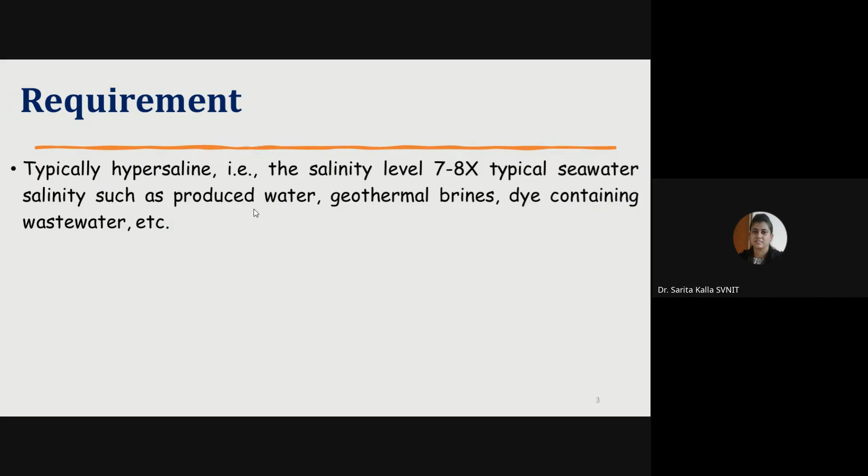Fine. So we all know that hypersaline water generally has a salinity level 7 to 8 times that of normally available water. That generally comes in the form of produced water, geothermal brines, dye containing wastewater, etc. So we have different treatment processes for this hypersaline wastewater.

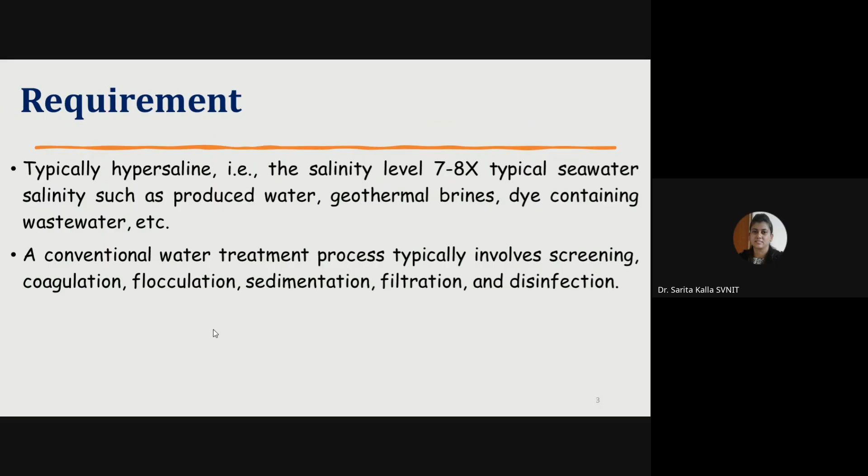But this conventional water treatment process involves screening, coagulation, flocculation, sedimentation, filtration, and disinfection. These conventional wastewater treatment processes are reliable, of course, but simultaneously they face different drawbacks like high operational cost, energy consumption, and generation of sludge and brine waste.

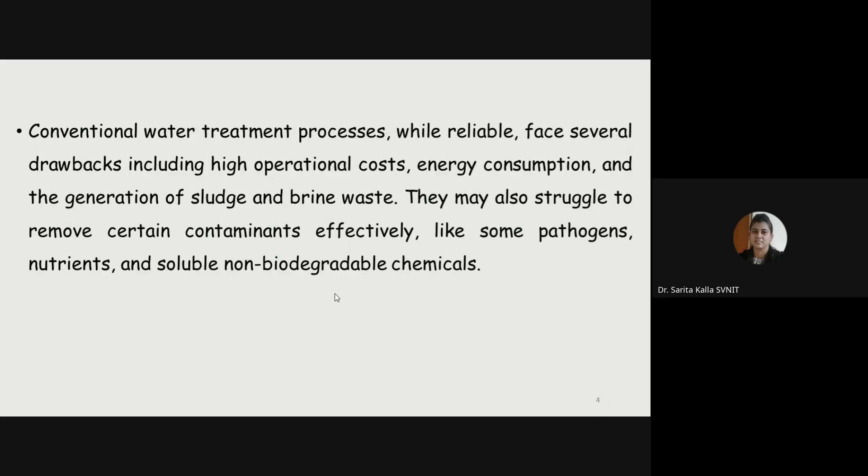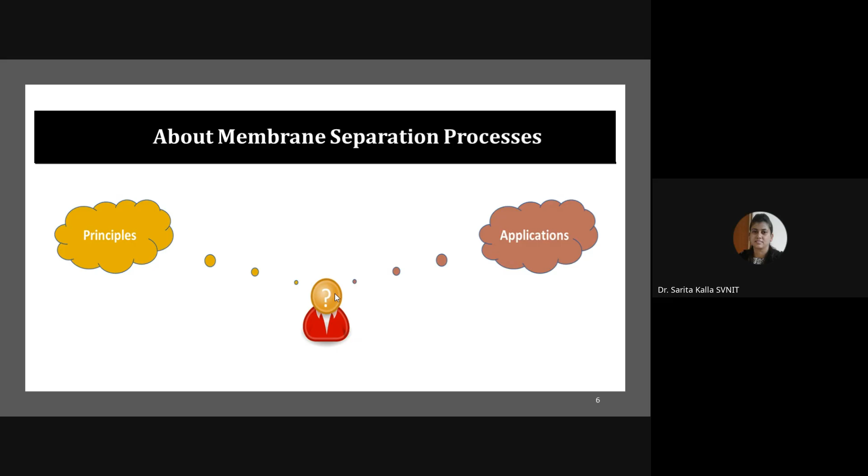And we are also struggling to remove certain contaminants that are not possible to remove using these conventional techniques, like pathogens, nutrients, and soluble non-biodegradable chemicals. So as a substitute for these conventional water treatment processes, we can use different membrane separation processes. Okay, so we'll see what are the most commonly used membrane separation processes, their principle and applications.

Fine. So the first one is membrane distillation. Membrane distillation is one of the emerging membrane separation processes; it is basically a thermal driven membrane separation process. The difference between membrane distillation and other membrane separation processes is that in this case only vapors pass through the membrane.

So we are not going to increase the temperature more than 80. Why is this so? Because if we increase the temperature above 75 or 80, then membranes start to degrade, because membranes are generally made up of polymers. Polymers start degrading after 75 or 80 degrees centigrade, and if membranes start degrading, then our process fails.

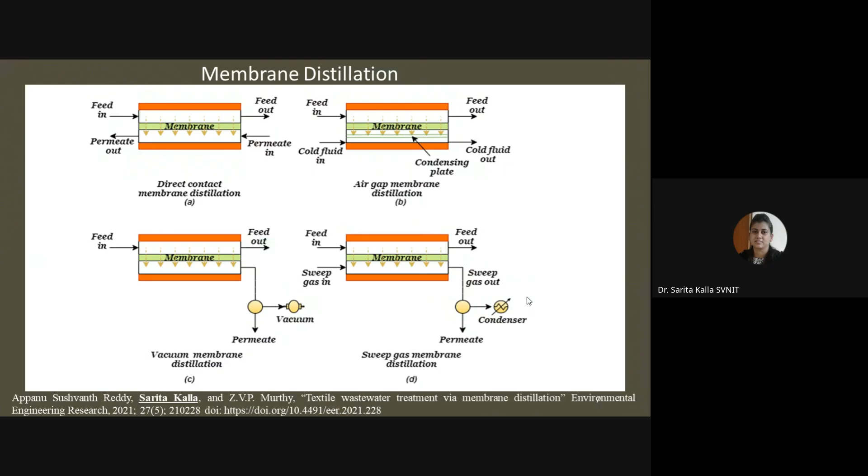So depending on the way by which you are collecting the permeate, MD is classified into four types: DCMD, AGMD, VMD, and SGMD. Fine. Then nanofiltration. So this first one is MD. Okay, second one. Most of you, I think, know about nanofiltration because it is the most popularly used and most commonly used membrane separation process.

So this nanofiltration membrane is capable of removing contaminants of size less than 0.001 micron, and it removes all types of bacteria, viruses, organic matter, divalent ions, and up to 90% of monovalent ions. So it depends on which type of feed you are using; according to that, you can select your membrane process. In our lab we select depending on which type of feed we are using and which type of membrane we have prepared.

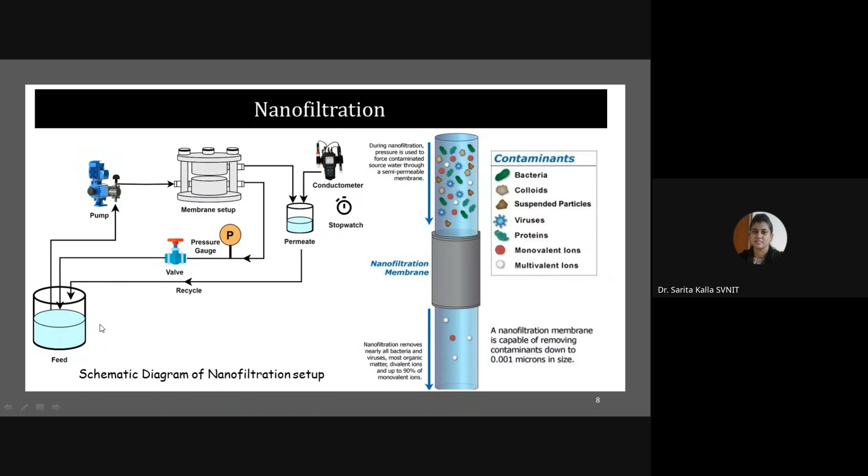Okay, the next is the membrane bioreactor. Again, this setup is available in our lab. You can understand by the name itself that it is a combination of biotreatment and filtration treatment. Biotreatment means we are using some microorganisms to degrade the organic matter present in the feed. Once these microorganisms break down the organic matter, the feed passes through a filtration medium, which may be a microfiltration or ultrafiltration membrane. It depends.

Fine. So it works in two ways; two techniques are used in membrane bioreactors. Microorganisms for biotreatment, and because organic matter degradation is there, some reaction is there, therefore it is known as a bioreactor. Then an aeration system is also used. It is only used to provide oxygen to the microorganisms so that they can survive and degrade the organic matter present in the feed. This is a simple air blower by which we provide the aeration.

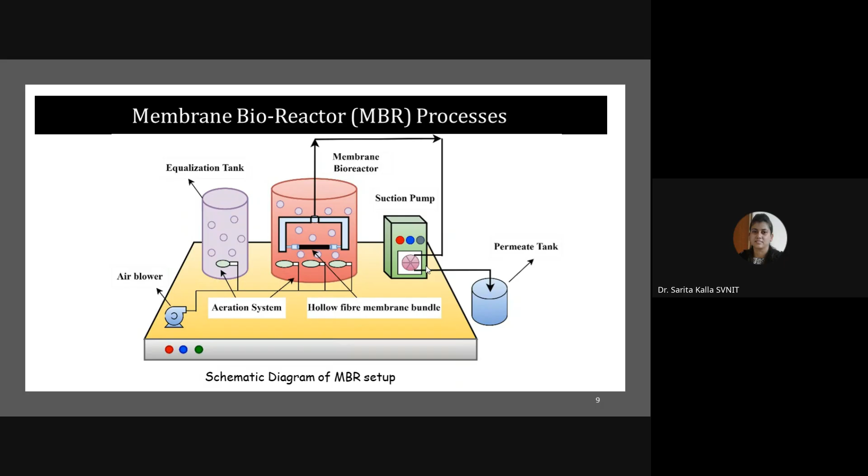We have already worked on municipal wastewater treatment; one of my students is currently working on it. We collected the sample from Surat itself, treated it through MBR, and observed very good results. But again, the main part is the membrane. We prepared the membrane also, but that we will discuss. So this is about the membrane bioreactor. Then, another process is pervaporation. I think you know about pervaporation.

So what happens in MD? As discussed, vapor passes through the membrane because we heat the feed, and vapor is generated and passes through the membrane. But here in this case, we use a liquid mixture or liquid feed, and this liquid will pass through the membrane.

After passing through the membrane, at the other side, or permeate side, it is going to convert into vapor. And how does it convert into vapor? We are using a vacuum pump.

Pervaporation is a combination of permeation and evaporation. First the liquid permeates through the membrane, and on the permeate side it evaporates and converts into vapor form. Therefore, it is known as pervaporation.

So we design the membrane in such a way that it is permeable or selective for one of the components. The feed is a combination of two components, so the membrane should be selective for one component, meaning one component can pass through the membrane and convert into vapor on the other side by using vacuum.

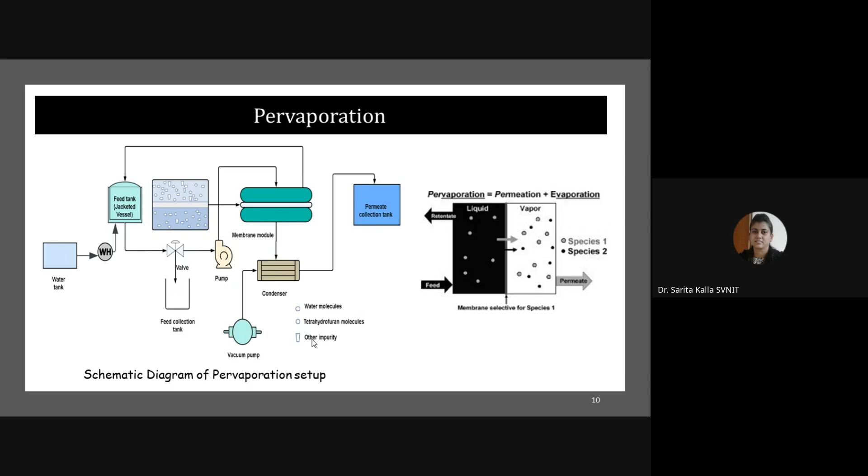Then another topic is electrodialysis and reverse electrodialysis. Currently we are not working in this, but we have already submitted one project on this, so let's see what will happen. But since we are talking about membrane separation processes, I want to give a brief idea about ED and RED. Simply, ED and RED are electrochemical membrane separation processes.

In the case of ED, we use electrical potential as a driving force, and in RED, we use concentration difference. ED is mainly used for desalination purposes because it uses an electric power source. We have a stack of membranes, anion or cation membrane, and in between these membranes some electrode is there. The positive charge ions attract towards the negative charge membrane, and negative charge ions attract towards the positive charge membrane, and we separate the ions depending on their activity.

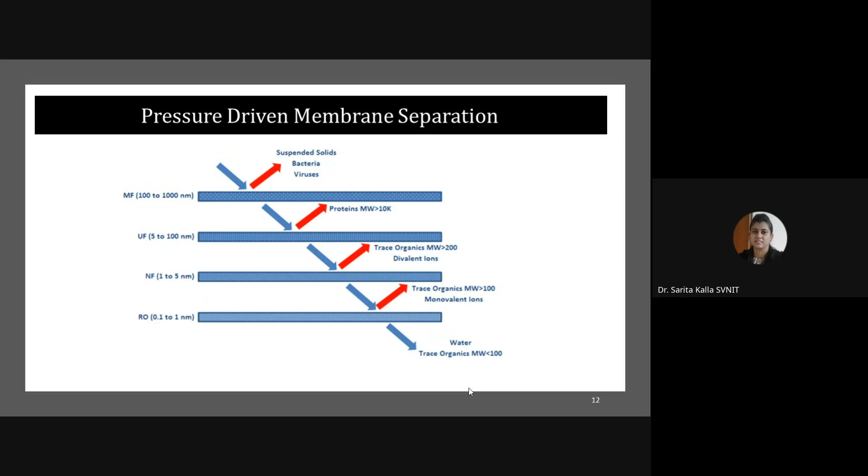Now, as I have already told, for any membrane separation process, the membrane is the heart of the process. So if we are talking about this MD membrane, these membranes can be of different types: hydrophobic, superhydrophobic, omniphobic, and Janus membrane. So depending on your feed solution, whatever feed you are using for the separation purpose, according to that you have to select your membrane.

So in that case, you can go for the superhydrophobic membrane. Then, if you want to separate a feed mixture having salt and some surfactant-containing mixture, in that case you can go for the omniphobic membrane.

So what is omniphobic? Hydrophobic means a membrane that can repel water. As I already explained, in MD, vapor is only passed through the membrane, so of course it should be philic for the vapors and phobic for the water. Therefore, we are using hydrophobic membrane in MD, and superhydrophobic means it has more hydrophobicity compared to the hydrophobic membrane.

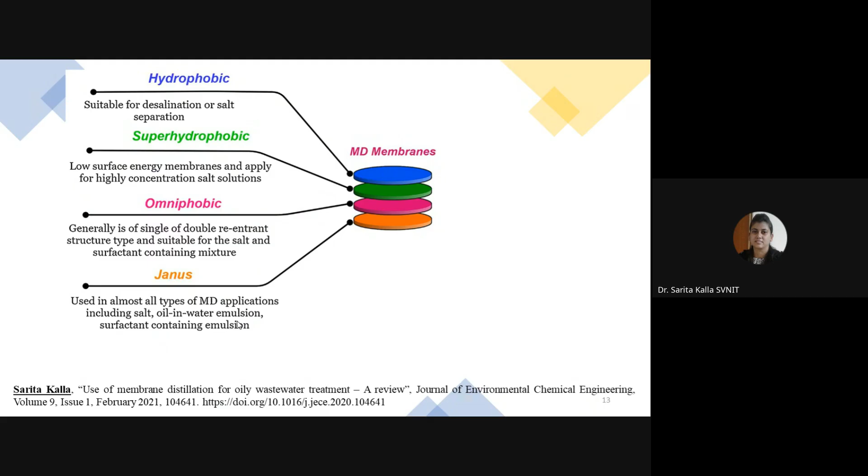So here you can see I have mentioned that the omniphobic membrane has a single or double re-entrant structure type. What is that? It's simple - you can see here these are Araucaria leaves, shown in this picture. They simply have some concave-like structure, up and down, zigzag, and very irregular. This type of structure provides very good surface roughness to the membrane.

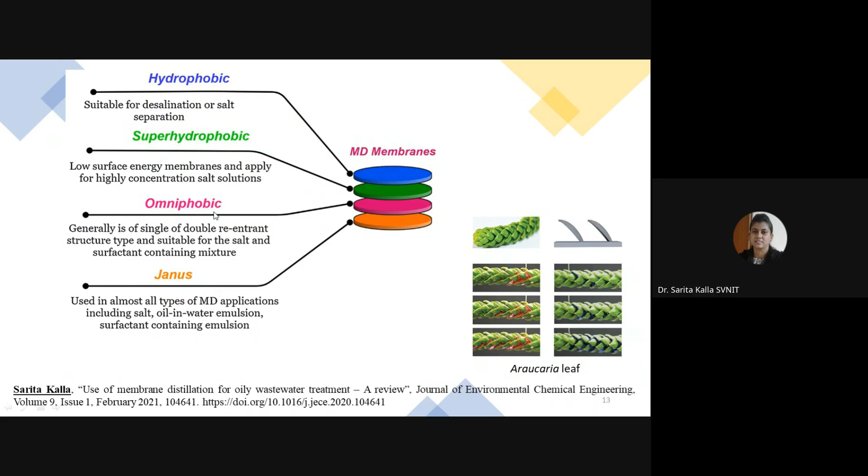Therefore, it is known as single or double - single or double meaning if it's double re-entrant it is more complicated, you are adding two layers of this type of surface on the membrane. I think you know about this leaf - it's the botanical term for this leaf, but we generally call it a Christmas tree leaf. So the structure of this Christmas tree leaf is the same as that of this membrane, having a single or double re-entrant structure type membrane.

So now we have seen this type of membrane that is generally used in MD. Now I want to show you how we can enhance the separation process by making changes in the membranes.

So that can be done. I have already told you in the starting that this can be enhanced by using some additive. This additive can be a nanoparticle, can be MOF, can be MCOF, and nanoparticles can be of different types. Then MXene, fine. So now we'll see one by one how we can enhance the performance of the membrane for different types of applications.

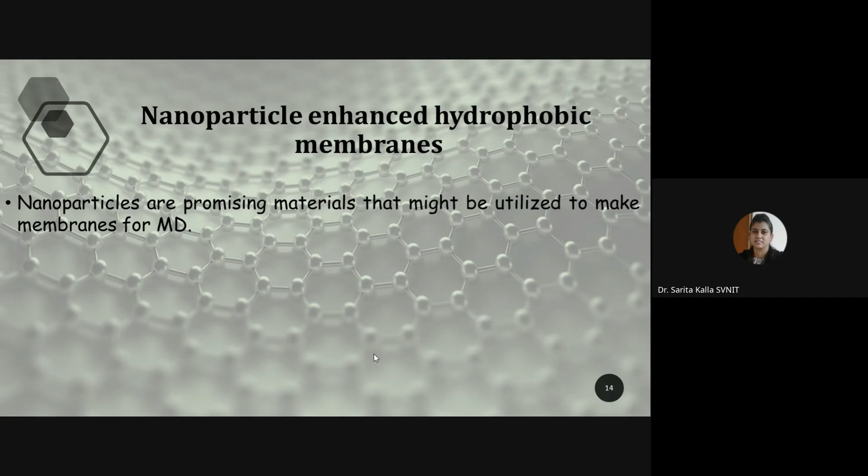So first one is nanoparticle enhanced hydrophobic membrane. So I just want to give a brief idea about this nanomaterial. I hope everyone knows about this. So these nanoparticles are very promising materials that can be used to make the membrane.

The inclusion of this variety of nanoparticles makes the membrane surface super hydrophobic. I'll show you how they can make the membrane super hydrophobic. This happens because there is a development of a set of functional material at the surface of the membrane, and ultimately it modifies the porosity and roughness of the surface, creating the functionalization of the membrane.

So simply, whenever you add some nanoparticles into the membrane surface, it will change its properties. Because there should be some reaction, there should be some functionalization of the membrane, and due to this functionalization, the membrane porosity can be changed, membrane roughness can be changed. Since we require a hydrophobic surface, this roughness can increase, and increasing the roughness ultimately leads to an increase in hydrophobicity.

Porosity also changes. Sometimes it gets increased, sometimes it gets decreased. So it means that is completely a research area. If we are successful in one part, then of course it will give you somehow good results - not the best, but good results. So it depends.

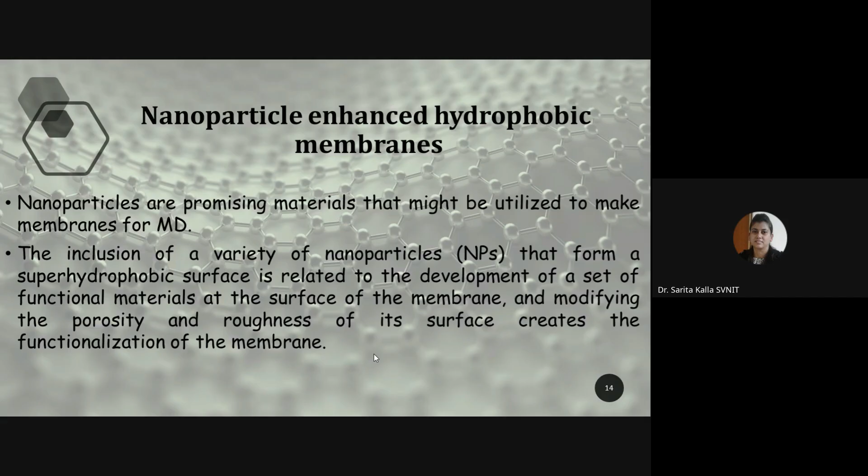What type of nanomaterials can we use? Metals and oxides like silver, titanium, gold, and iron - these are most commonly used for environmental mitigation purposes. TiO2, SiO2, Al2O3, ZnO, MWCNT (multi-walled carbon nanotubes), activated carbon, graphene oxide - these are also very popularly used nanomaterials to manufacture polymeric nanocomposite membranes.

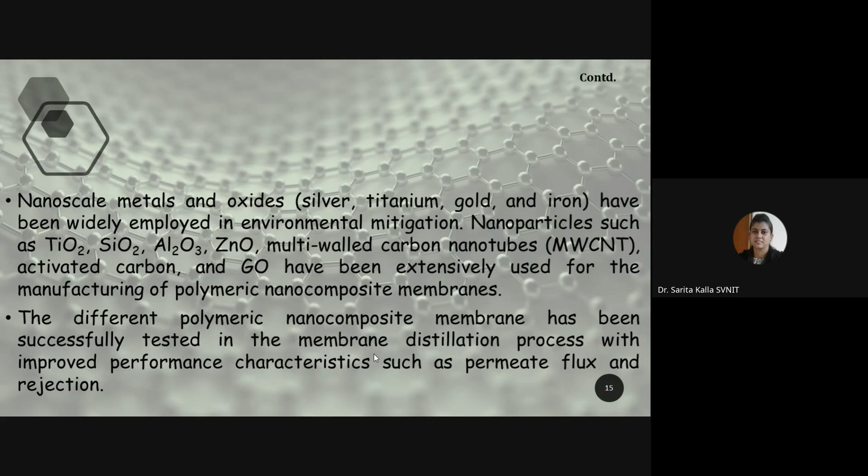So here, whatever membrane we are talking about are polymeric membranes. Means we are using some polymer, right? So till now, different types of polymeric nanocomposite membranes have been successfully tested for membrane distillation process.

This ultimately improves the performance of the membrane in terms of permeate flux and rejection. Permeate flux is the amount of permeate you are collecting per meter square of area of the membrane in 1 hour. And rejection means, if you are using some dye containing wastewater or salt containing wastewater, how much rejection is there. So in the case of MD, it is observed till now that there is almost 99.9% rejection.

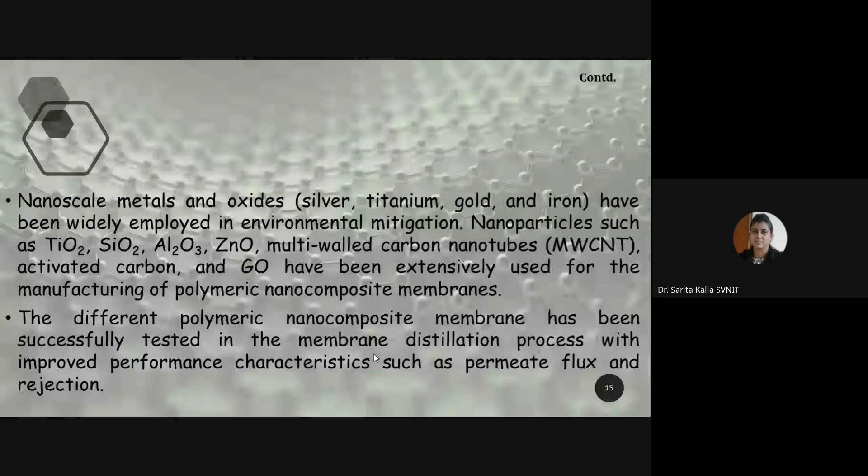You can simply understand this by the concept that in the case of MD, we are using a hydrophobic membrane, and this membrane only allows vapor to pass. So if only vapor is allowed to pass through the membrane, then there will be no passing of salt. So of course you are getting pure water on the permeate side, and there will be complete rejection on the feed side.

So this is one of the works carried out by one of my master's students, and that work is published in Journal of Water Process Engineering. In that work we prepared two membranes. First one is a pure polymeric membrane, PVDF membrane, and another is a nanoparticle containing membrane. You can see here in this table, the nanomaterial that we have used is TiO2.

So we prepare the first membrane using PVDF polymer. DMF is the solvent - you need some solvent - and PEG 200. PEG is simply an additive that we have added to create more pores in the membrane. So it is simply a pore forming agent, along with TiO2.

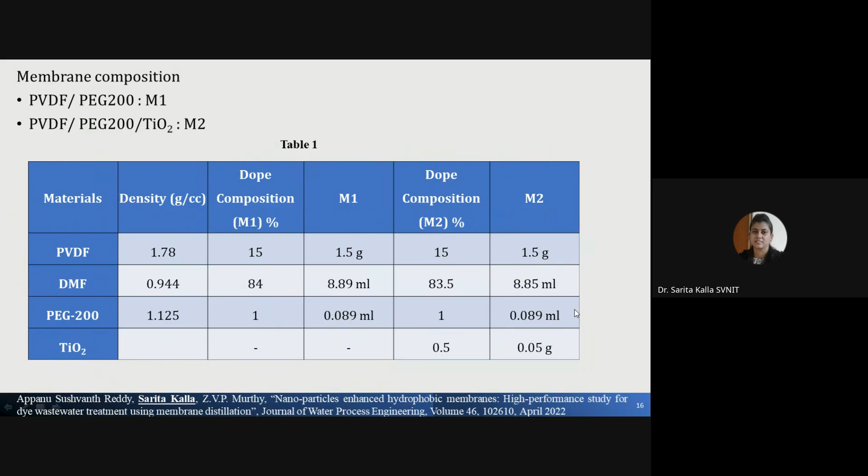So we prepared two membranes, one without nanomaterial - you can see here no concentration of nanomaterial is present - and another membrane having 0.05 gram of nanomaterial, that is TiO2. We tested these two membranes for methylene blue dye removal. So you can see, first I just want to show you the simple steps used for the preparation of membrane in the lab.

So it is generally common if you are preparing a polymeric membrane. But what happens nowadays, people are working on commercial membranes also, meaning they are purchasing the membrane from outside, and then they test it in the process. But we are preparing the membrane completely in our lab. So we have a setup for that. This membrane casting machine is there.

So you can see here, these are the simple steps of fabrication of M1 and M2 membrane. In the M1 membrane, we have the polymer. In the bracket, the percentage shows the concentration. So PVDF polymer and solvent are mixed together. Then we heat it and stir it at 120 rpm for 3 to 4 hours at a temperature of 60 to 80 degrees centigrade. In that step we also add PEG, and again there is stirring.

And why do we do that? To prepare a homogeneous dope solution. So this dope solution is prepared, and then we degas it. If you mix something, there is a chance of creating bubbles, so we have to remove the bubbles by degassing. And then you can see here, this is the casting. Once the dope solution is prepared, we cast it in the membrane casting machine.

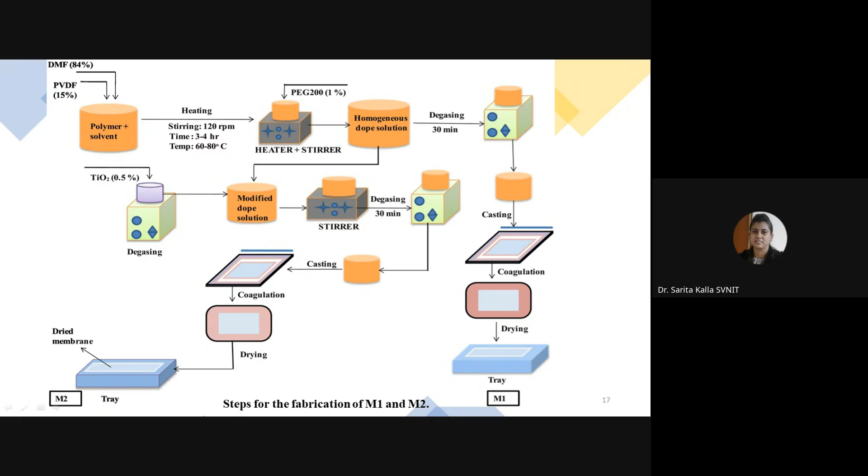So this is the M1 preparation, and for the second we have to add TiO2. All the steps are the same. We are simply adding TiO2 particles of 0.5% into the feed, and then we get the M2 membrane. Fine. So these are the results that we get.

One important thing I have to mention here is that in all types of separation processes, there are some operating parameters. In the case of MD, the operating parameters are generally feed temperature, feed concentration, meaning whatever feed you are using and what concentration, then flow rate of the feed, and the flow rate of the cooling water also. But as per the literature, and we have already studied, the effect of cooling water flow rate on the permeate is very small, so we can ignore that. So we are taking these three operating parameters to calculate their effect on permeate flux.

So this is simply the results. We have carried out 9 experiments, and these experiments are designed using the design of experiments method; in this case we have used the Taguchi method. By the Taguchi method we created our design, then carried out the experiments, and these are the experimental results, and these are the predicted fluxes from the Taguchi method software we used.

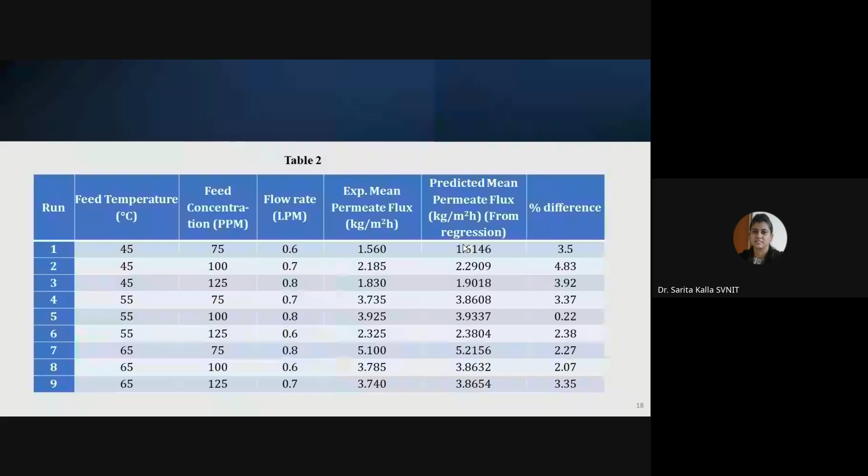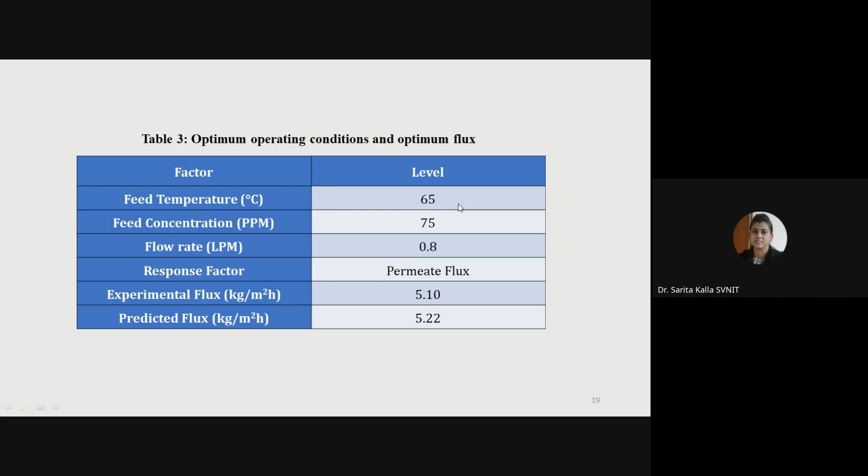So after analyzing the results, we found that the experimental flux is around 5.10 kg per square meter hour and the predicted flux is 5.22, and these are the values of the optimum operating condition, meaning these are the best results at these operating parameters: feed temperature 65, feed concentration 75 ppm and flow rate 0.8 lpm.

And this shows the membrane properties. You can see here we have measured the contact angle, porosity and thickness of both membranes: the PVDF PEG membrane, which is the pure PVDF membrane, and the membrane containing TiO2 nanoparticles. In this case the contact angle decreases a little for the M2 membrane, but porosity increases, and thickness remains the same.

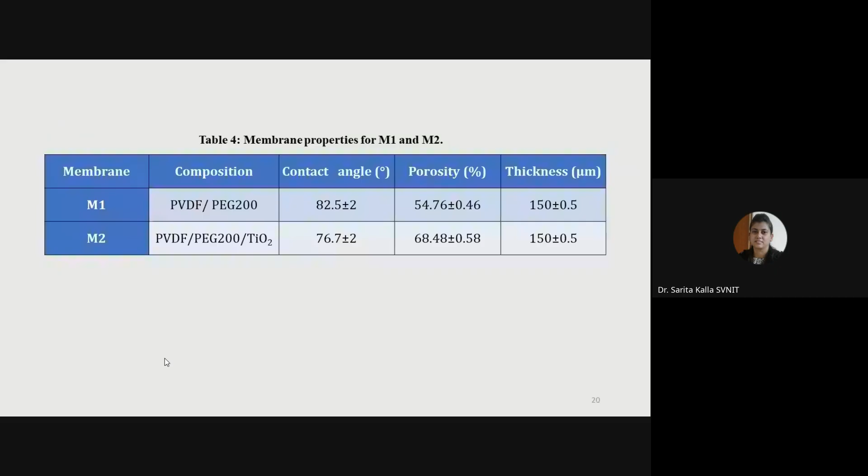Okay, so you can see here the final result simply shows that when we are adding TiO2 nanoparticles into the membrane, there will be an increase in the flux.

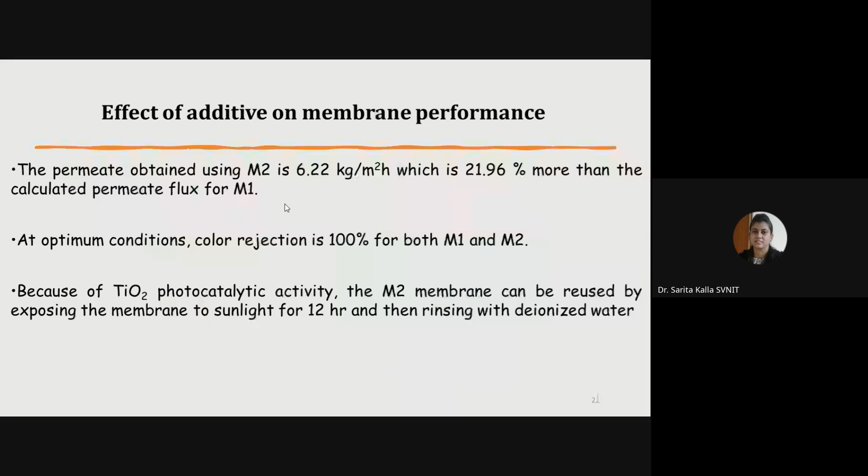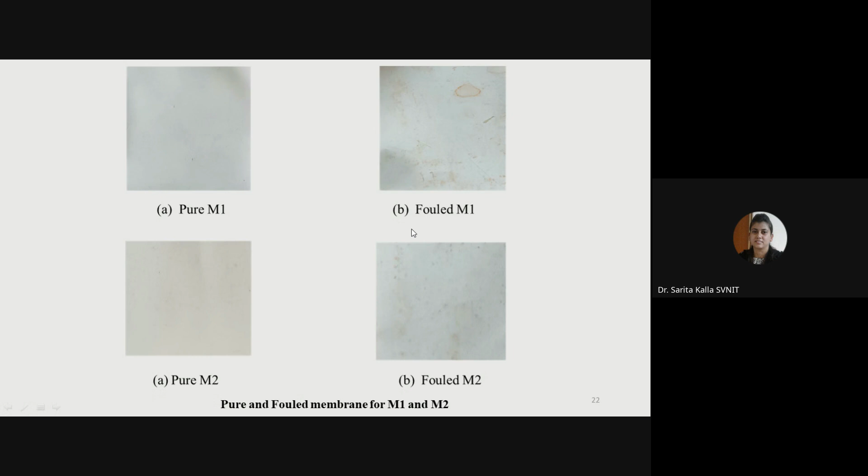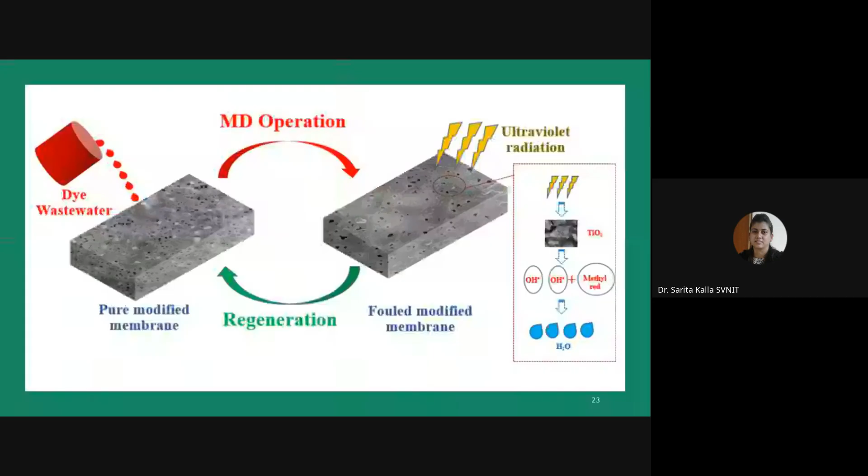Right, meaning you don't need to replace the membrane. You can simply regenerate the membrane by exposing it to UV light. So you can see here these are the pictures of the pure M1 membrane, pure M2 membrane, and these are the fouled membranes, meaning after operation. Okay, so simply the purpose of using TiO2 particles is to improve the flux, and also we can regenerate the membrane in this case. Okay, so this is about the TiO2 nanoparticles.

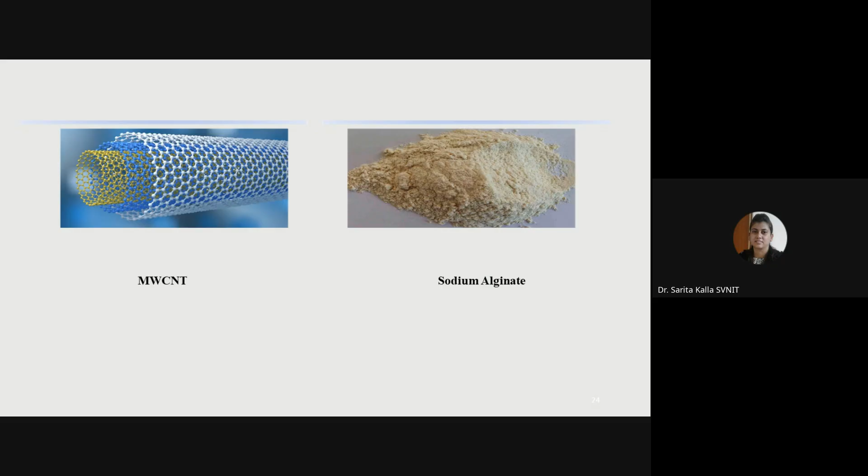Another work that we have carried out is using MWCNT nanoparticles and sodium alginate. Sodium alginate is a biopolymer. So we have used PVDF polymer, MWCNT nanoparticles, along with sodium alginate as a biopolymer. So why have we used sodium alginate? Because we are already using MWCNT. Sodium alginate creates an extra surface on the membrane that will help in fouling reduction and increase the mechanical properties of the membrane. Fine.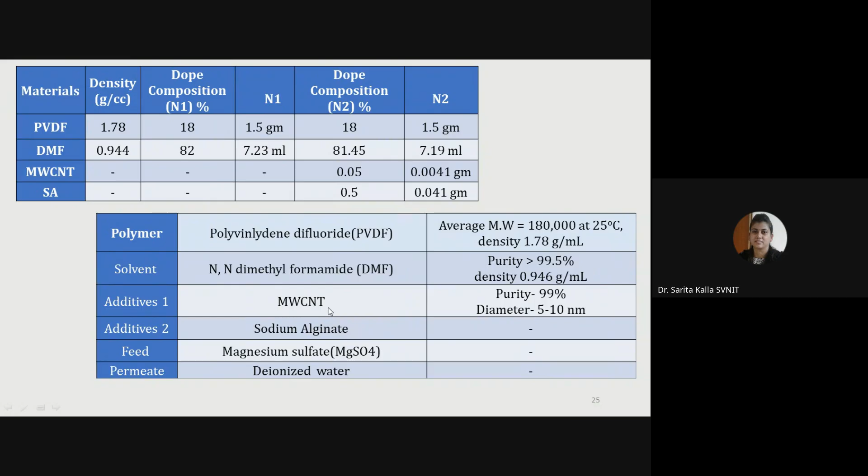Okay, so you can see here these are the simple properties, and the purity here. And you know about multi-wall carbon nanotubes, they simply have a layered structure of graphite layers. We also carried out the carboxylation of MWCNT using sodium chloroacetate and KOH. The purpose of this carboxylation is to improve the functionalization of the membrane.

So we add the MWCNT and KOH solution with water. Then we mix it, then sonicate it for mixing, then for 3 hours at 100 rpm and 90 degrees centigrade. So it is very important to maintain the temperature and other operating conditions.

Actually, I want to share one thing: right now my students are facing a lot of problems with membrane preparation, because sometimes the dope solution is not prepared properly. Sometimes there may be a change of temperature, even the humidity of the lab; whatever temperature and humidity is present in the lab at that time will also affect the membrane. So you may think it is very simple. No, it takes a lot of time, and many times membranes are not prepared properly. If there is one small hole, then we discard it.

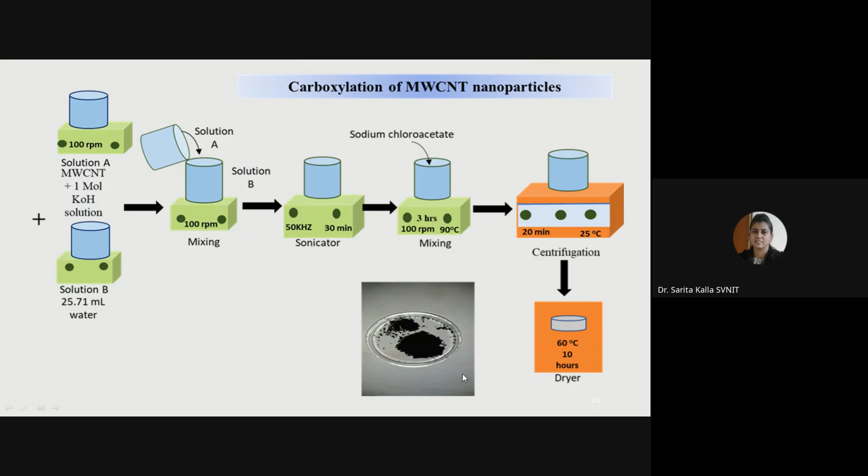Fine. So it is simply a step of carboxylation of nanoparticles, and this is the final nanoparticle. And again these are the steps for membrane preparation, which are the same as the previous one, so I'm not going to explain in detail. These steps are for the pure PVDF membrane, that is N1, and these steps are for the N2 membrane.

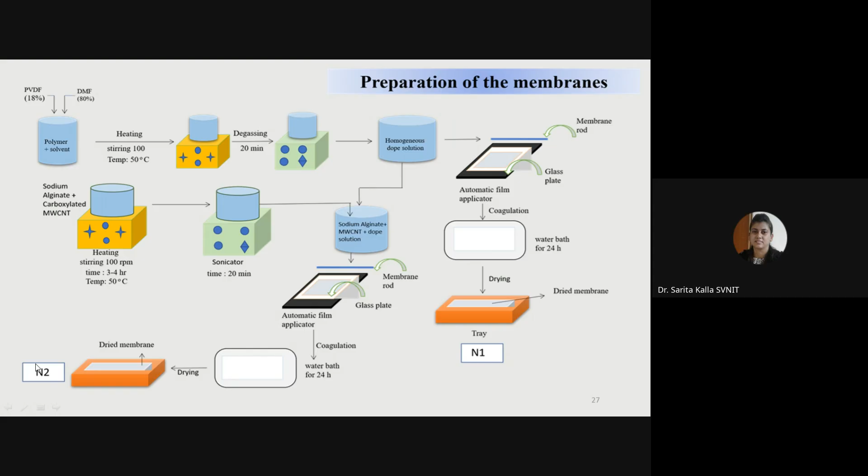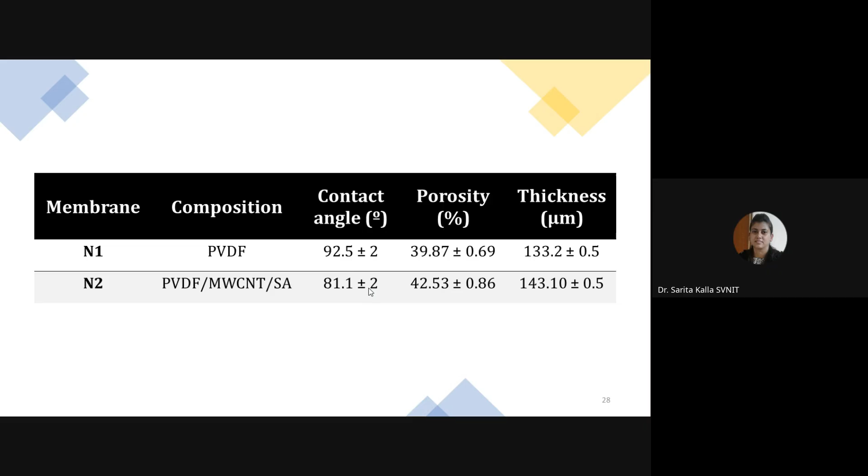Fine. Again we measure the contact angle, porosity and thickness of the membrane. Here you can see, because we are functionalizing the membrane and adding sodium alginate, the thickness of the membrane is increased in the case of N2. Porosity is increased, and the contact angle is a little bit decreased. But at the end we have to check the effect of this addition of MWCNT and sodium alginate on flux and rejection.

Okay, fine. So these are the AFM images of our membrane. We also ran our experiment for 100 hours, so after 100 hours we have to check the stability of our membrane. After the continuous run of 100 hours, we observed this AFM image of the membrane.

The first one is for pure PVDF, this one is for fouled. This is pure PVDF MWCNT SA, and this is fouled PVDF MWCNT SA. The surface roughness increases in the case of PVDF MWCNT SA. I think I forgot to add the Ra or Rq value here. In AFM, they generally give the value of Ra and Rq, by which we can identify the surface roughness.

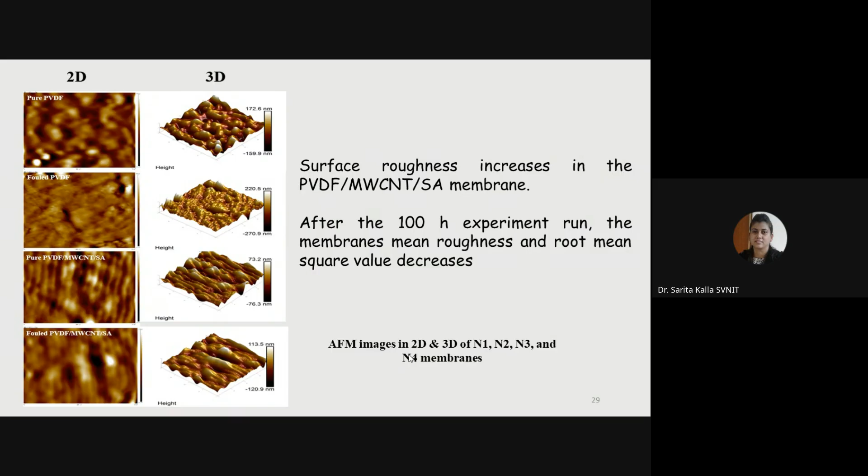And this work we carried out for desalination application, which I'll show you. Again, this simply shows the value of flux, how much flux we are getting with increasing temperature and concentration. Feed flow rate, or here temperature: when we increase the temperature, you can see flux increases, and rejection is almost constant in all the cases. The reason for that I have already explained. Fine.

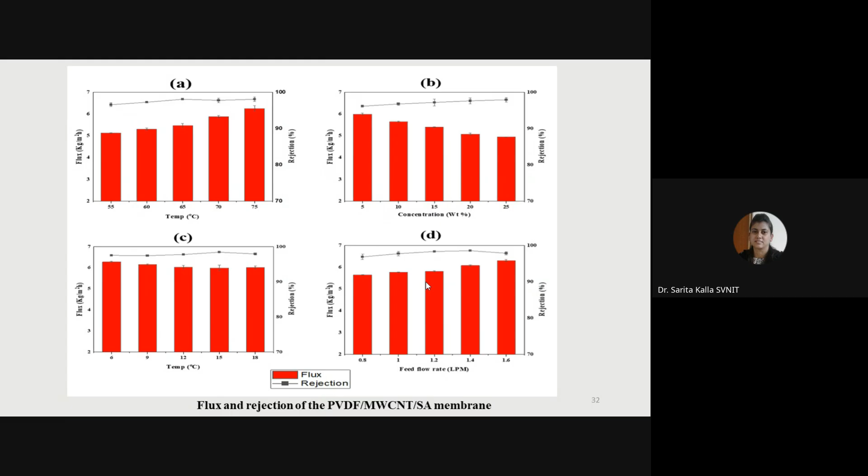In the case of concentration, the flux decreases. Why? Because there is some concentration polarization. As we increase the concentration, there will be increased salt deposition on the membrane surface. For feed flow rate, of course, when we increase the feed flow rate, the turbulence at the membrane surface increases, and more vapor will pass through the membrane. Right?

Okay. So after nanomaterials, we can use MOF for preparing the membrane. MOFs are right now the most popularly used component for different applications. Right now we are also working on the gas separation process, but I'm not going to discuss it in detail. I just want to give a brief idea of MOF.

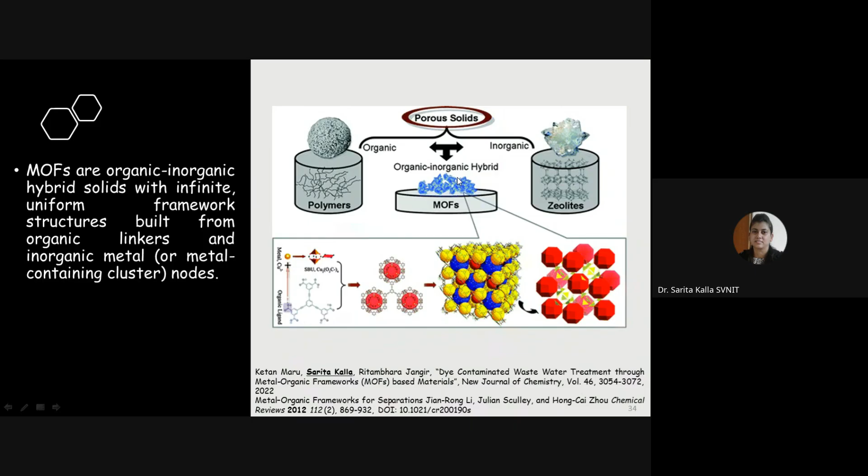I think you know about this. MOFs are organic and inorganic hybrid solids with an infinite uniform framework structure, meaning they are made up of organic and inorganic material. The organic part is made up of some polymers, and the inorganic part is some zeolite or metals. So it is simply an organic-inorganic hybrid material. And what is the purpose of using MOF? These are some advantages: they are highly crystalline porous materials, and they are generally used for water and wastewater treatment applications.

They are highly tunable, meaning by changing the concentration or changing the value of different parameters, you can change the properties of MOF very easily. Distinct pore structures and high specific surface area. So all these properties we require for the membrane can be fulfilled by the MOFs, right?

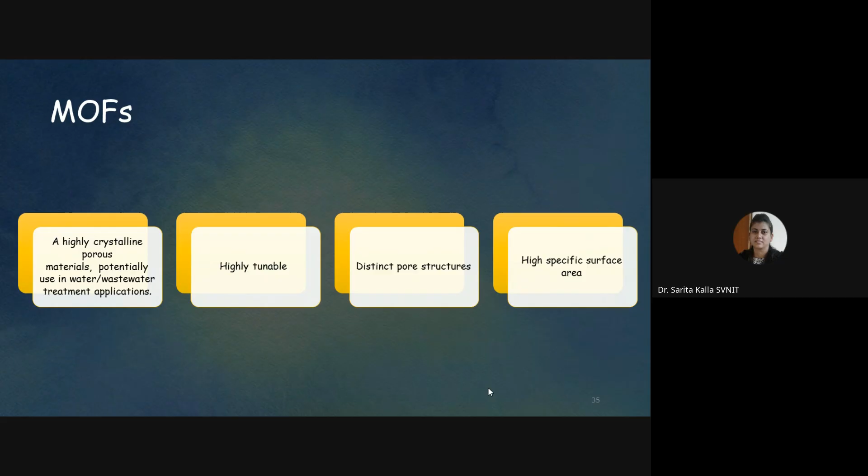But of course, if it has some advantages, disadvantages will also be there. High cost, poor mechanical properties, and complicated synthesis processes are the main problems with MOFs. Preparation of MOF is very complicated. It generally takes 6, 7, 8 months. If your reaction is okay, it will take minimum this much time.

So these MOFs are inorganic porous materials, and they can be used as fillers with polymeric membranes. Whenever we use MOF in the membrane, the membrane we get is known as mixed matrix membrane, MMM, that is, a hybrid composite membrane. In a mixed matrix membrane, we take the advantages of both the inorganic porous material and the organic polymer, because we already use a polymer for membrane synthesis, and the inorganic porous material comes from the MOF.

Another challenge with membrane preparation is that highly compatible connection between the two phases is a challenging issue. You are mixing the organic part with the inorganic part, so how are you going to make a connection between these two phases? It is a very challenging issue.

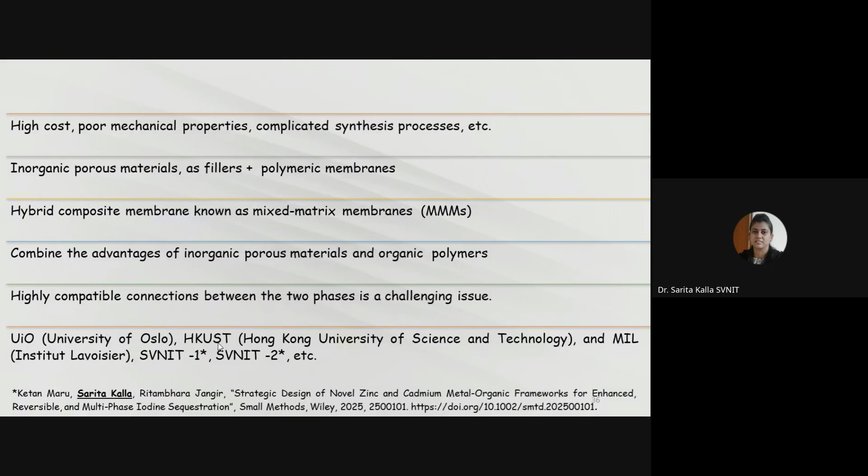These ligands were prepared in the lab, and we used them with zinc and cadmium metal ions to prepare a completely new MOF, and then we used this new MOF for iodine sequestration. This work has already been published in 2025 in the Small Methods journal. If you want to learn more details, you can go through this paper.

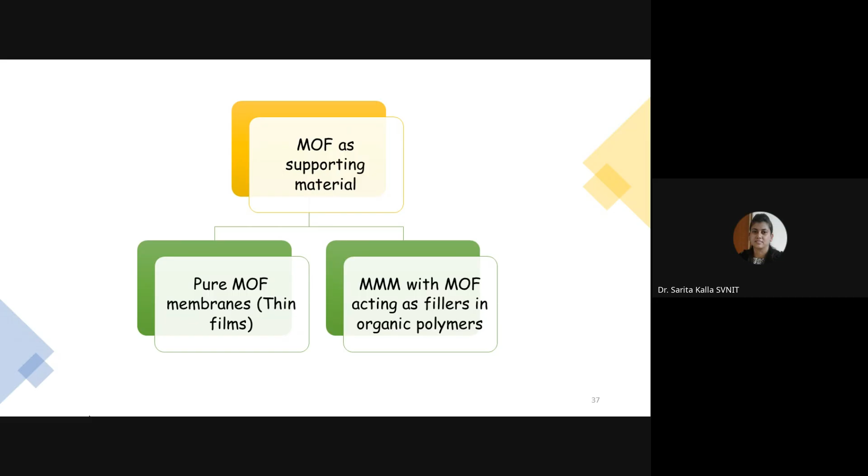So this MOF can be a supporting material and can be used directly as a thin film, or it can be mixed with polymers to make an MMM, mixed matrix membrane. So you can use it in two ways. It depends on your application and your conditions.

This is one of the works in which we prepared hollow fiber. I discussed initially that membranes can be flat sheet or hollow fiber. This work is based on the hollow fiber membrane along with some MOF. Again, we prepared two membranes. One is pure PES. In the previous cases we used PVDF membrane, but in this case we used PES polymer along with MIL-101(Cr). This is your MOF; here the metal used is chromium.

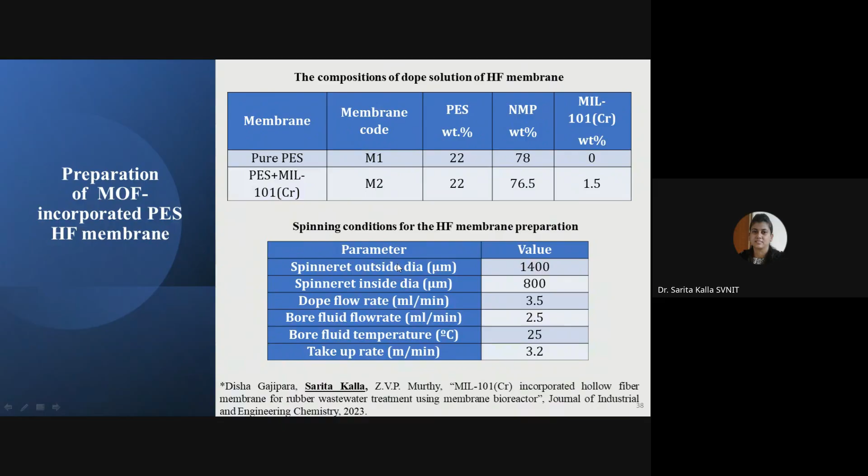NMP is the solvent we used, and these are the conditions of hollow fiber membrane preparation. There is a completely different setup for hollow fiber membrane preparation. I'll show you. These are the parameters we used for the membrane preparation, like spinneret outside diameter. I'll show you the spinneret; I think it is in the next slide.

So you can see, this is the spinning process of hollow fiber membrane preparation. These are the pictures of the membranes we prepared. You can see here, this is the polymer solution we have to add in one of the chambers.

In another chamber there is a bore fluid, and it is going to pass through, and this is the spinneret. The spinneret is a simple needle-like structure through which this polymer passes, and we get this hollow fiber membrane, and this is your storage tank. I simply want to show you one video so you can see.

You can see this type. Okay, so this is your storage tank. You can see this is the hollow fiber membrane, and they are directly coming into this water. So you can see it looks like a very easy process, but the main thing is that you have to maintain the viscosity of the polymer.

Last year, one of my MTech student's work stopped for 2 months because there was some problem with the viscosity of the dope solution, and it was not going to pass through the spinneret. A spinneret is a simple needle-like structure, so you have to maintain a proper consistency of your dope solution so that it can be easily passed through the spinneret, and we can get this type of hollow fiber membrane.

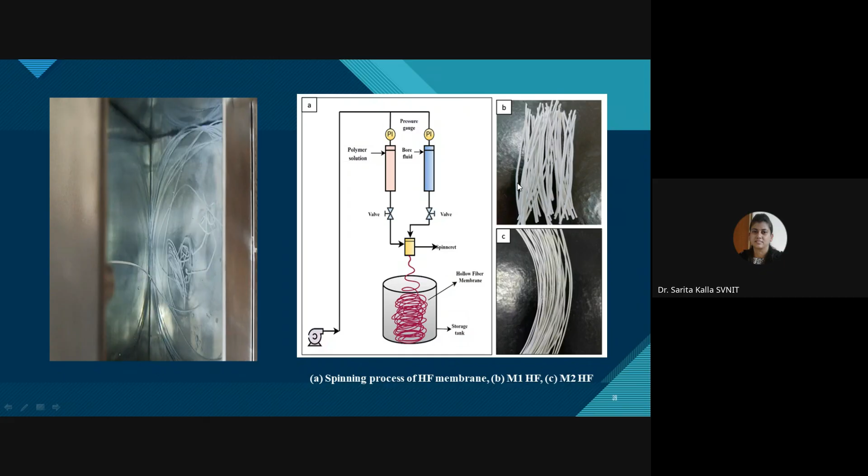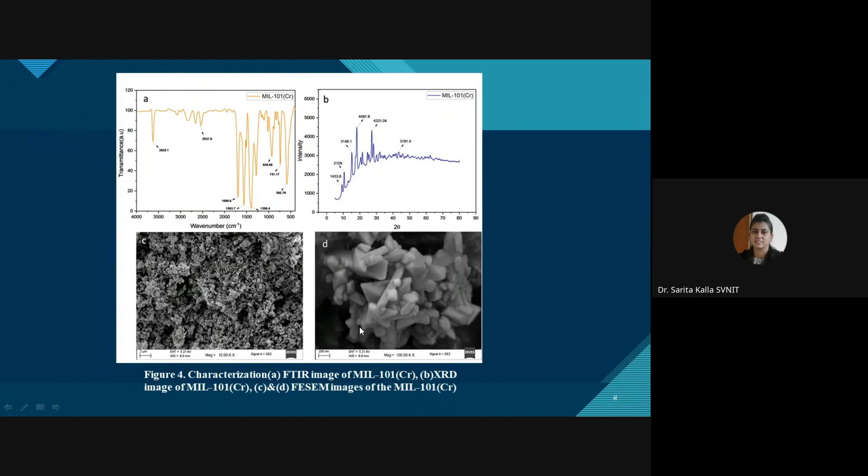These are the characterization of this MOF. The results were very good, and you can see the structure here. This is the flower-like structure of the MOF that we received. These are the FTIR images. And these are the FESEM images of the cross-sectional view, because we have used hollow fiber membrane.

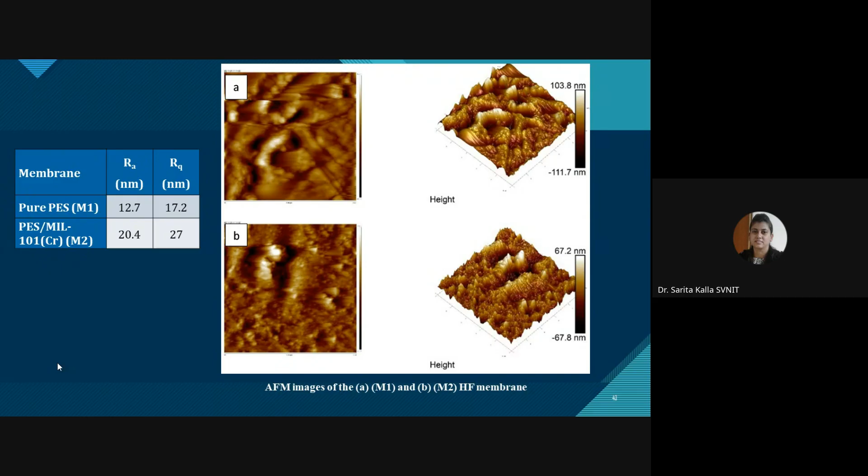I forgot to tell you that this membrane we have used for rubber industry wastewater, whatever wastewater is coming from the rubber industries. And then we have checked the COD, BOD, TSS, and TDS removal for M1 and M2 hollow fiber membranes.

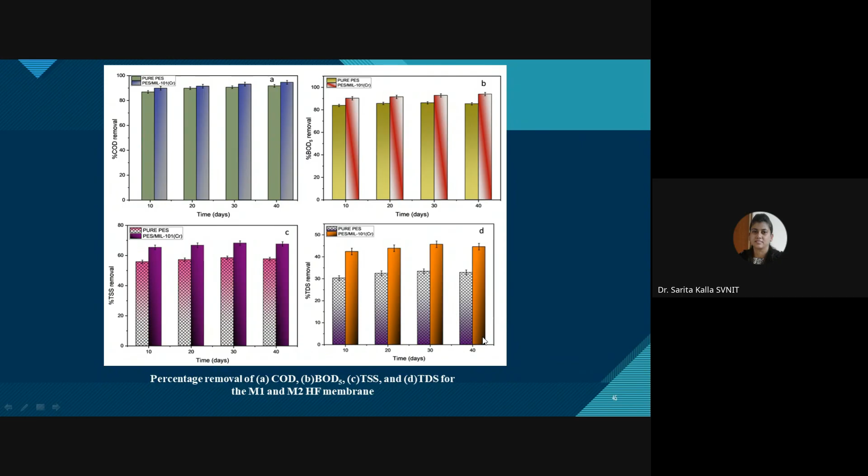So these are the results, and in all the cases you can see that in the case of the M2 membrane the removal is higher than the pure PES membrane. This is for COD, this is BOD, TSS, and this is for TDS. And this is the picture for the porosity and mean pore size of the membranes.

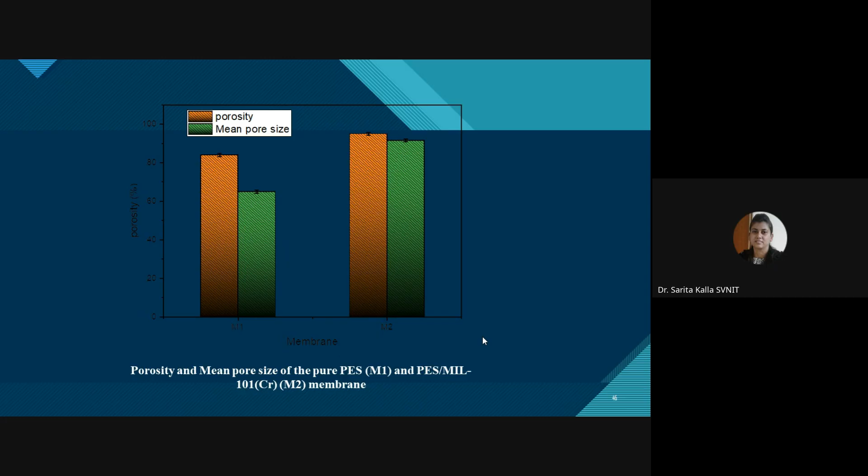Here we have mentioned PWF is pure water flux. You can see in the case of M2, the water flux increases. And one more thing I want to mention here: in the case of flat sheet, the flux is around 5.6 or 6.81 kg per meter square hour. But in the case of hollow fiber membrane, the flux is around 82 liter per meter square hour.

So the main difference with hollow fiber membrane is that of course the synthesis is complicated compared to flat sheet, but the flux is much higher than the flat sheet membrane. And again we ran the setup for 240 minutes, because we have used this setup for MBR. In the previous two cases we used MD, but here we have used the MBR process.

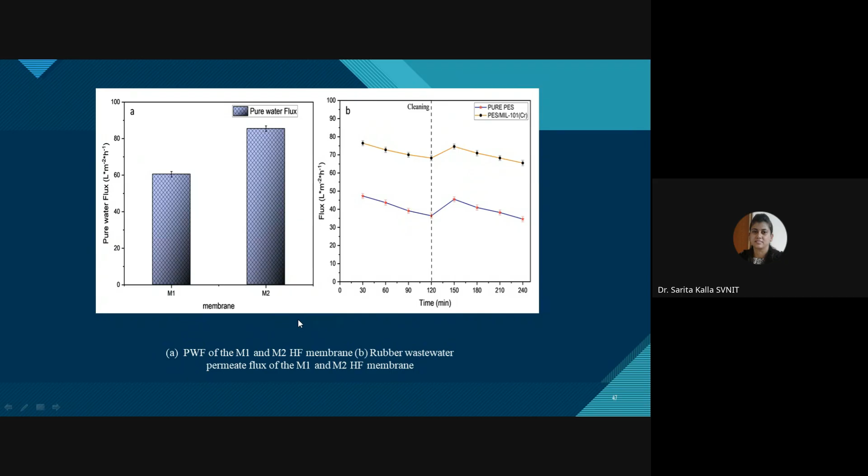So we ran it for 240 minutes to see how the flux changes. You can see the flux is decreasing with time up to 120 minutes. Then we clean the membrane, use it again, and the flux increases. And you can see again it starts decreasing. So regeneration is there, but after some time it starts decreasing.

Fine. Another work, we have time. Another work is again related to hollow fiber membrane preparation, but here we have used UiO-66 MOF. This is simply the preparation of the MOF, UiO-66, and in the second case we have functionalized this MOF with hBN.

Why we did this was to increase the desalination efficiency of the membrane, and that we have proved also. After adding hBN, the flux increases. So this is simply the step, and the MOF was prepared in the laboratory using the hydrothermal method.

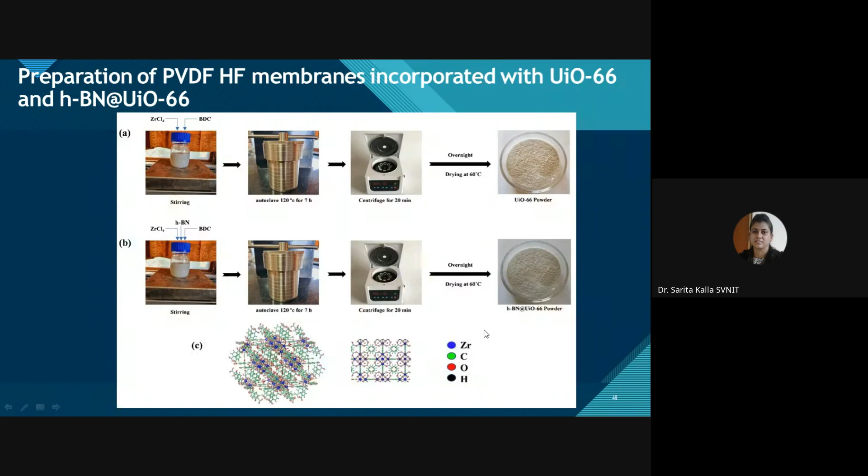Okay, so this autoclave we have used, and in this we have kept this feed component ZrCl4 and BDC, benzene dicarboxylic acid. So it's simply the steps by which we prepare the MOF.

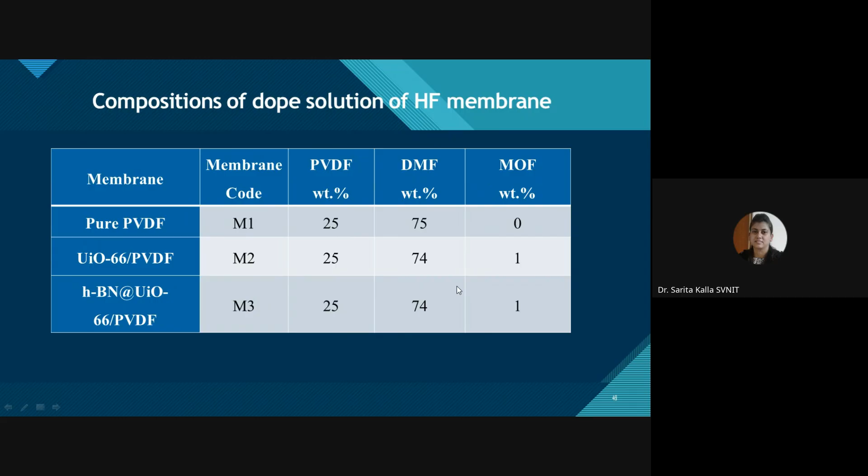This is the composition. We prepared three membranes: pure PVDF in which MOF is 0, then UiO66 PVDF with 1% MOF, and this one with HBN, where MOF used is again 1%.

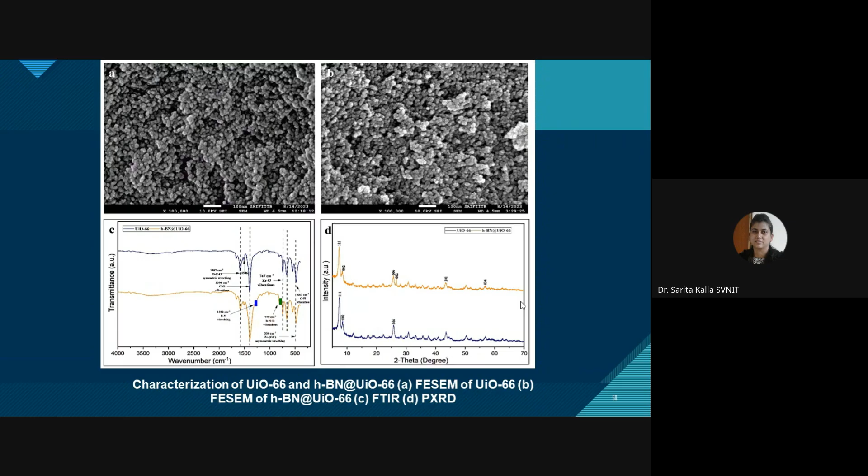We have used NaCl, KCl, MgSO4 and CaSO4. You can see these are the flux values, these are the rejection for M1, these are for M2, and these are for M3. Rejection is almost very good and consistent for all the membranes, and flux can vary.

You can see here in the case of M3, flux is highest as compared to M1 and M2 membranes. Lowest for M1 and highest for M3, because again using MOF, and this MOF is again functionalized with HBN.

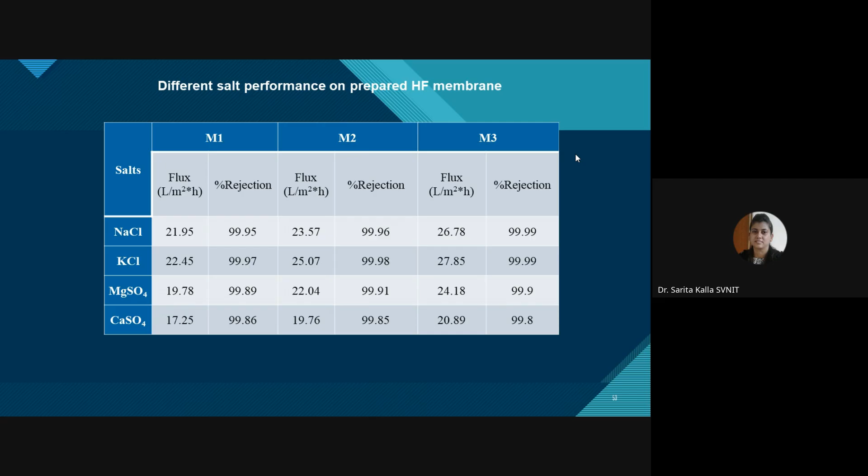So this is the last case study. Here we have used, I think you've heard about, PFAS compound, perfluoroalkyl compound. These compounds are generally known as forever chemicals, because they have a fluorinated component in their structure, and they are generally found in tap water or industrial wastewater, coming from different industries like cosmetic industries, paint industries, etc. The treatment of these PFAS chemicals is very very tough, and very little work has been done in this area, so we worked on this.

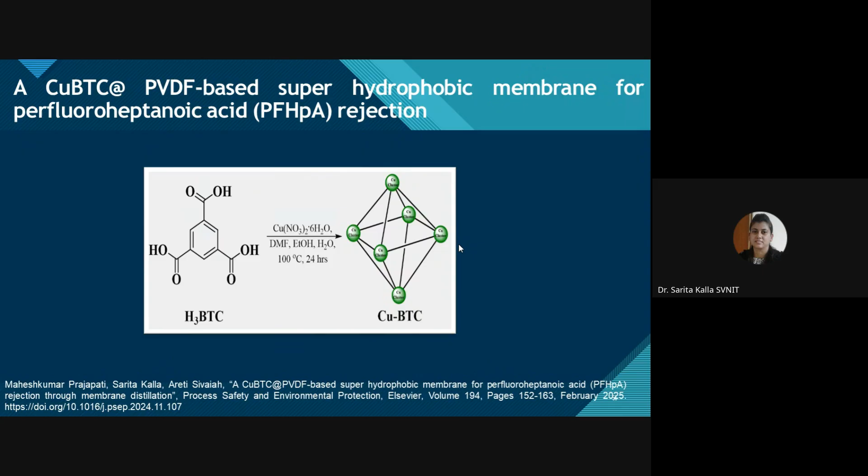So we prepared again this MOF containing membrane for the removal of perfluoroheptanoic acid, one of the PFAS compounds, using membrane distillation. This work is already published in a Process Safety and Environmental Protection paper. I'm not going to explain in detail.

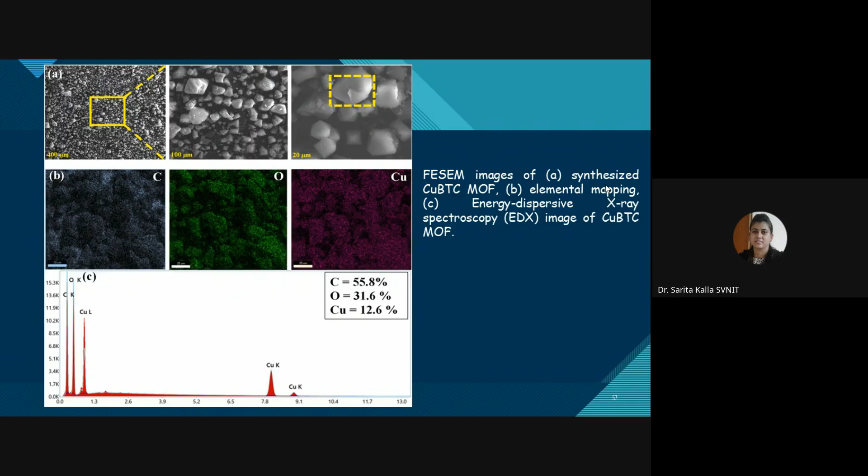Then the FESEM images. You can see here again we got very good MOF structure.

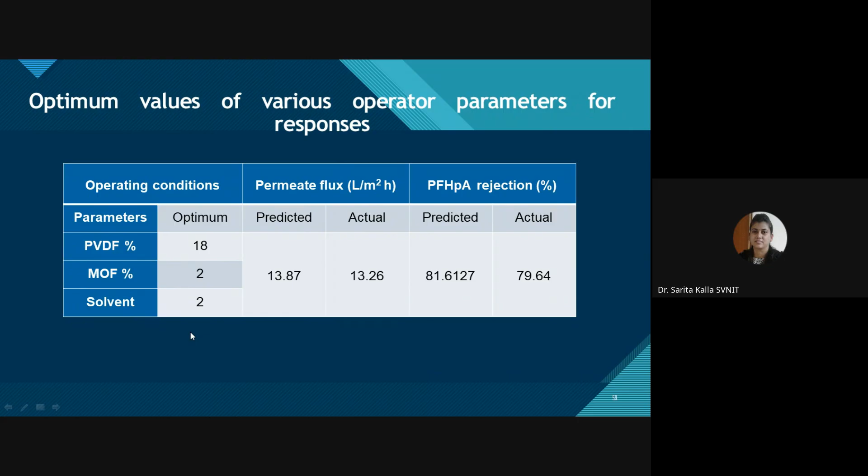These are the values of the permeate flux. The obtained experimental value is 13.26 liters per meter square hour, and rejection is 79.64 experimentally, containing MOF. When we are having 2% of MOF, 18% of PVDF, and 2% solvent, then we got these results.

Actually this membrane is also prepared by two methods, single coagulation method and dual coagulation method. In the dual case, the value of porosity is a little bit higher than the single coagulation method.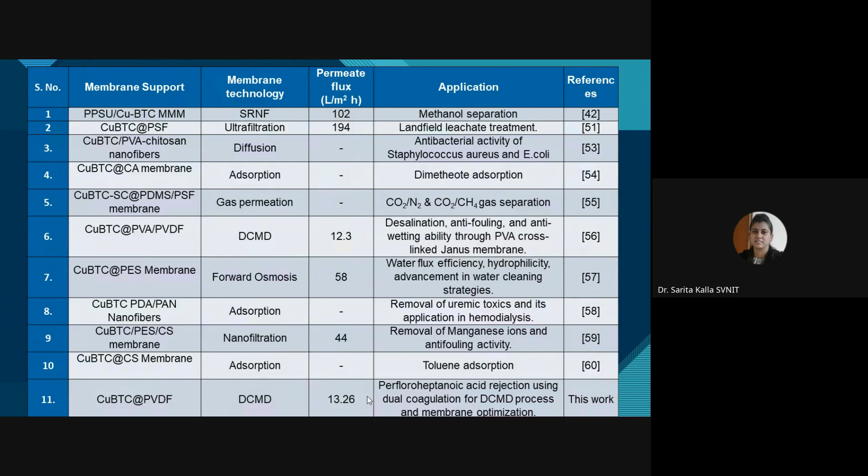One more thing is there, let me quickly wind this up. So currently we also work with MCOF. MCOF is simply the combination of MOF and COF, fine, so MOF is metal organic framework and COF is covalent organic framework.

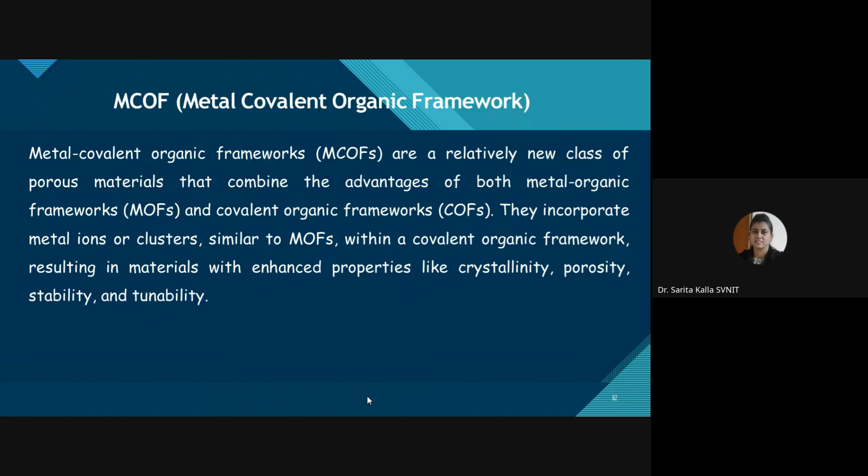So here in MCOF we are taking the advantages of both MOF and COF.

MOF are crystalline materials made up of metal ions or clusters, generally linked with some ligands. They are known for high surface area and porosity, which we have already discussed, but stability can be the limitation.

In the case of COF, they are porous crystalline materials but completely composed of organic building blocks connected together by strong covalent bonds. So COF have excellent stability, but may have the limitation of functionality associated with metal ions present in MOF.

So you can see here, in the case of MOF, stability is the limitation, but in the case of COF, stability is very good. But here they have this limitation of association with metal ions that are present in MOF.

So what happens is this metal covalent organic framework comes into existence to bridge the gap between MOF and COF, by incorporating metal ion or cluster into the structure of COF. So COF and MOF combining together results into the MCOF.

This approach allows for the creation of materials with the desirable properties of both: high surface area and porosity of MOFs, and stability and tunable structure of COF. So we are combining MOF and COF and getting the advantages of both.

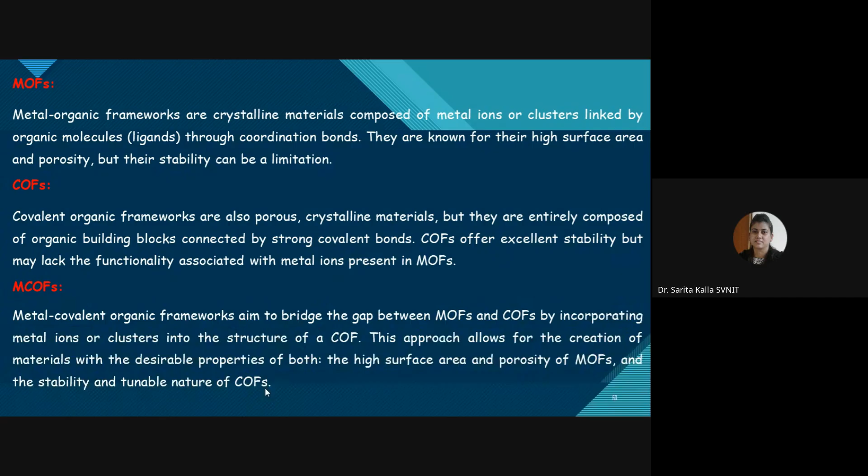And the new component that we are synthesizing is MCOF. This work has not been published yet; it has already been submitted to some journal.

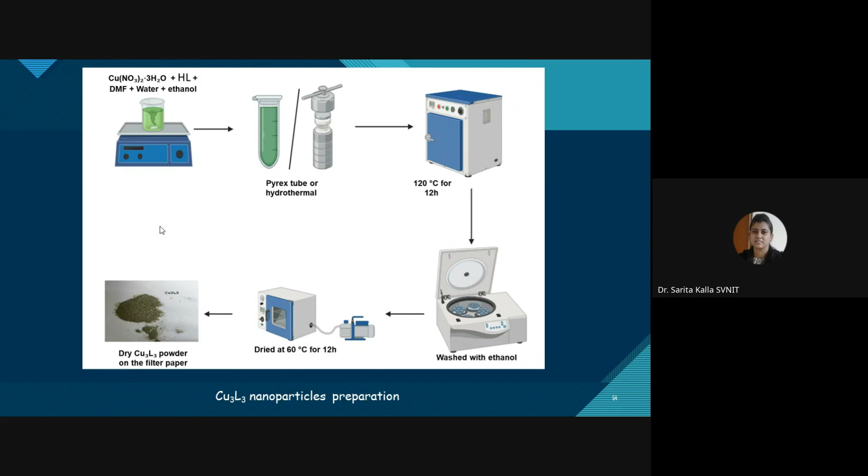We have prepared MCOF using two methods: the Pyrex tube method and the hydrothermal method. There is not much difference between these two, but we prepared it using both methods, and then we obtained this dry Cu3L3 powder.

This Cu3L3 powder is mixed with TAPB and mesitylene, then dioxane and acetic acid - these are the different additives we have used. So at the end we are getting this Cu-TAPB COF powder on the filter paper.

So Cu is the copper, and TAPB is 1,3,5-tris(4-aminophenyl)benzene COF nanoparticle. So Cu is for the metal organic framework part, and this is for the covalent organic framework part.

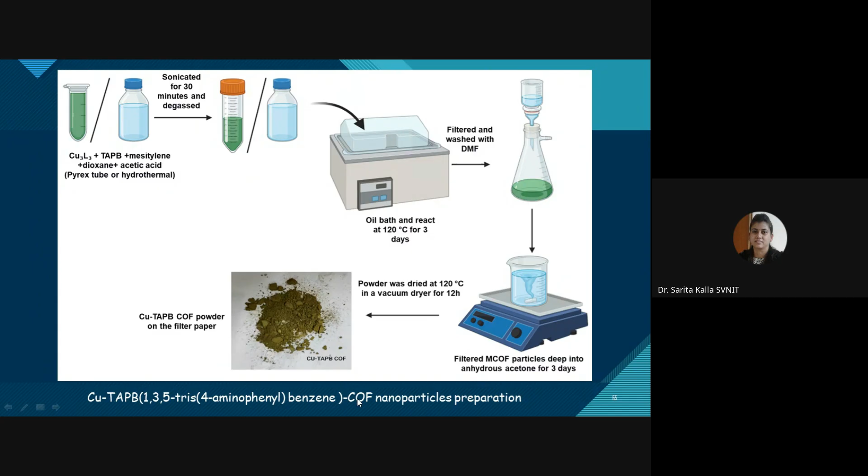So we have prepared this MCOF, and then this MCOF we have used for membrane preparation using PVDF polymer and NMP solvent, and then tested it with THF recovery. You can see the flux here.

So we prepared 4 membranes, depending on the concentration of MCOF - we used 0, 1, 2, 3% of MCOF. By increasing the MCOF percentage, you can see the flux increases.

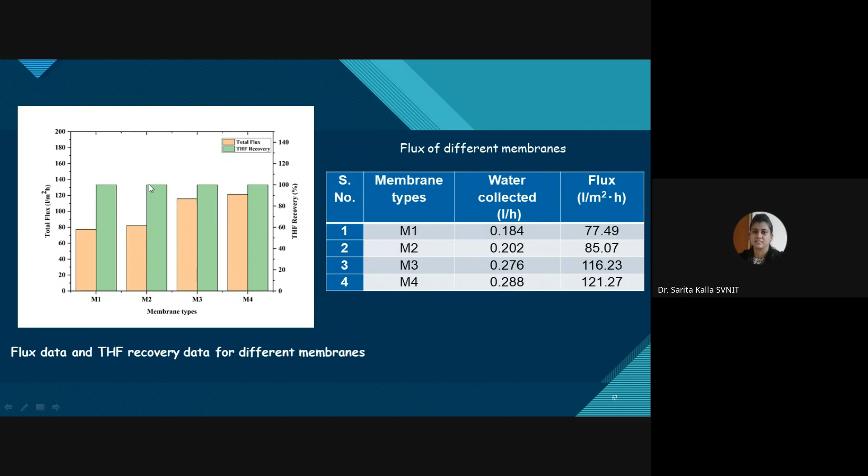And the recovery is almost the same across all these 4 membranes. So these are the same images again.

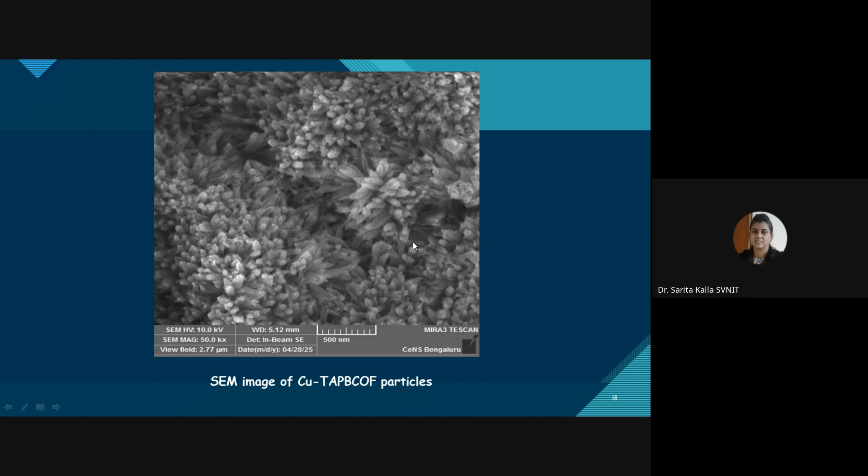Again, you can see very good images of MCOF we have achieved - this flower-like structure, a very beautiful structure.